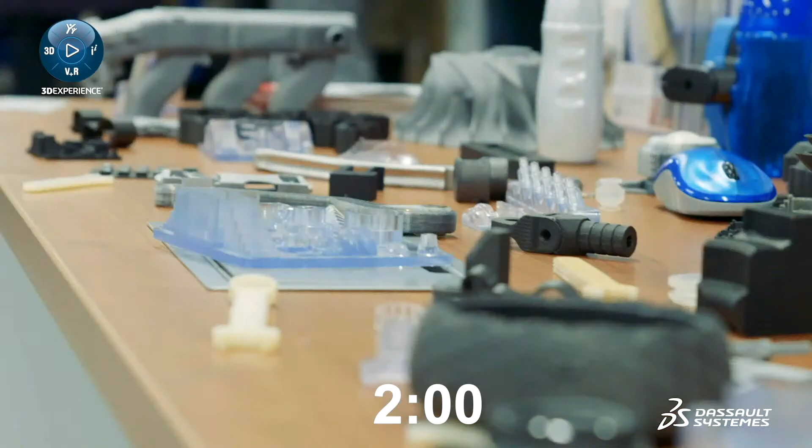SOLIDWORKS user groups got their start in 1997, created by users to learn from each other, provide networking opportunities, share their tips and tricks, and more. The first time I attended a SOLIDWORKS user group meeting was in about 2005.

What makes me keep coming back to these is that you're trying to learn new techniques, and there's a lot of minutia and detail that you're not going to learn on your own. So if you can talk to other users, it's very helpful.

The one thing that stands the user group apart, I think, above anything, is the community and the camaraderie and the people involved, and how being involved can get you further professionally and personally.

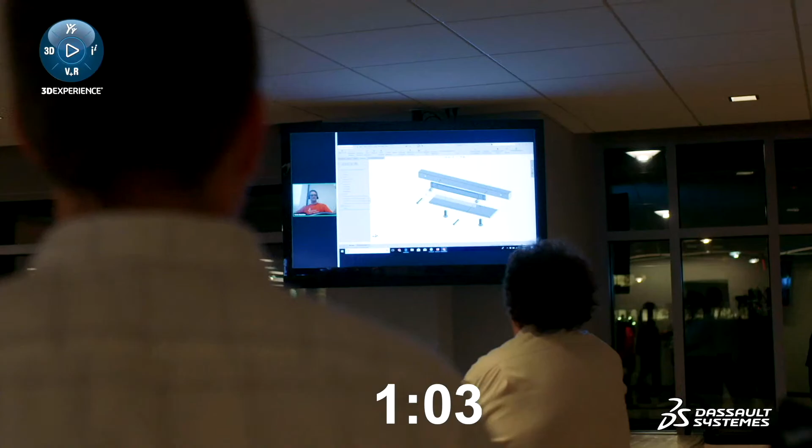Being a SOLIDWORKS Users Group member has benefited me professionally. I always enjoy tips and tricks. I've been going to SOLIDWORKS Users Group since '06. I will see one or two every time I go to a presentation that I didn't know existed, or that it's a better way to do something that I've been doing for years.

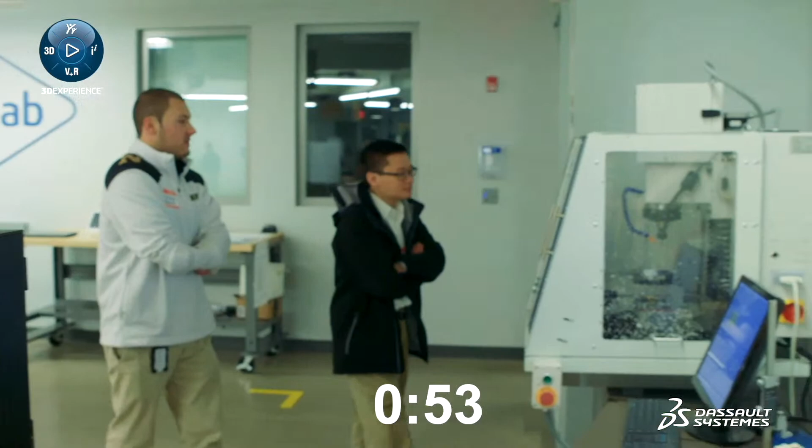I have met colleagues, which is very important. I've met suppliers, and finally, I've met potential customers for over 10 years at Users Group meetings.

I am honored to be part of this community. I have for years, and if you aren't, you should be part of the SOLIDWORKS User Group Network. It gives you tips, tricks, and shortcuts you will not find in formal training. It's awesome, and it's free.

It's a fun environment. Everybody gets to know everybody. You get to learn. It's kind of free learning. It's great networking. It allows you to learn from the experts around.

I do a lot of presenting as well, so it forces me to learn, so I'm an expert on the topic before I get up there. So all the way around, it lets me be a better SOLIDWORKS user.

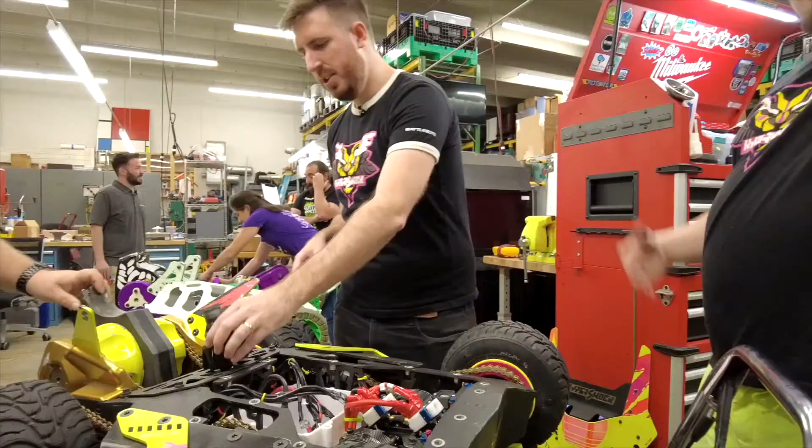So during this episode, we'll first set out by giving you all the insider look at how Battlebots teams Hypershock and Witch Doctor came to be. These teams, headed by Kyle Allner and Will Bales on the Hypershock side, and Andrea and Mike Galatly on the Witch Doctor side, are quite fortuitously based here in Miami.

So this meant we were able to grab a bite to eat with them and head over to their shop to discuss things like, how did you get into making robots? How did you get into Battlebots? How does it feel to work really hard on something only to maybe, just maybe, see it get blown to smithereens?

And for those of you at home, what advice would they give someone getting into engineering? And is there a way for you to get involved with Battlebots today? So we'll answer all these questions and more as they explore how SOLIDWORKS has helped and continues to help them accomplish their goals. And speaking of their SOLIDWORKS skills, both teams are giving technical presentations on surface modeling and simulation related to their bot designs at a special SWUGN meeting at the Kubek Center here in Miami.

And guess who gets to watch that? You guys, of course, and everyone going to the in-person SOLIDWORKS user group meeting. So it's a great time to get involved in the SOLIDWORKS community. You can learn, you can make new friends, and maybe even meet some TV stars from the Discovery Channel.

And as you can see, I am all set to head over to the Kubek Center for those tech presentations. Well, maybe half set. So while I go and get ready for the SWUGN meeting, let's take a look at the conversation we had with those Battlebots teams.

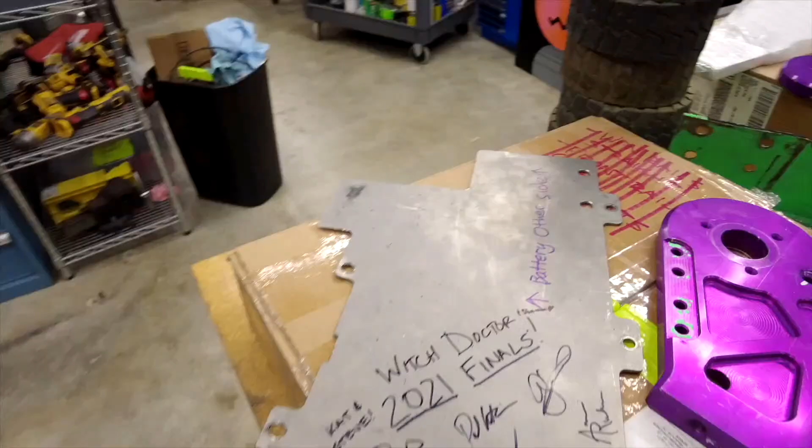All right, we're here on SOLIDWORKS Live. We are obviously not in a production studio, we're at your guys' shop. How's it going, guys? Going great. This is amazing, you guys just have so much capability. I wish you could all be here, all of you watching from home, but why don't you just start by introducing yourselves? I'm Mike Galately from Team Witch Doctor.

I'm Andrea Galately from Team Witch Doctor. I'm Will Bales from Team Hypershock. Kyle Warner from Team Hypershock.

Many of us have been watching BattleBots for seasons upon seasons, and we've had questions we would have loved to ask you if we were ever in Miami and you invited us to your shop. We have that here today, so I'm excited to ask some of these questions. And of course, we have the bots right in front of us. This is super cool. These bots were designed in SOLIDWORKS, right? Of course, what else would you use? What a ring? Is there something else? What a ringing endorsement!

But I think just to start at a very human level, how did you guys get into BattleBots? That's a question we get a lot. Whenever we talk to the BattleBots teams, like I've talked to you guys over the years about just getting SOLIDWORKS and the best stuff to use, but how did you guys get into BattleBots? That's a pretty long answer, but I'll let you start.

Well, I'll start with how it ties back to SOLIDWORKS. I actually started using SOLIDWORKS in high school, and we didn't have any SOLIDWORKS class. I just learned to use it because I was trying to build a robot, and it's really hard to build a robot without modeling it first, it's really limiting. I went to an all-girls Catholic high school, plaid skirts, knee-high socks, the whole thing, and they had a massive, really well-regarded combat robotics program. BattleBots used to be BattleBots IQ, which was the collegiate and high school version. So I got really lucky that I was in a school where it was easy to get involved, and I haven't stopped doing it since.

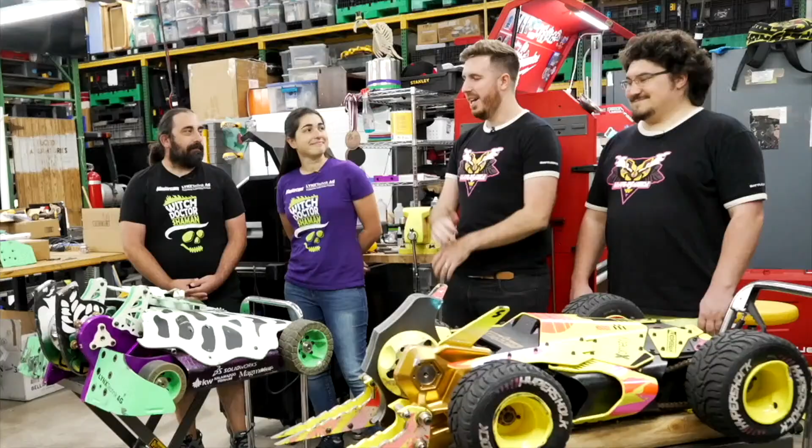So when I was old enough to do it, my friends Tyler and Benji Pantoja and I built our very first robot. It was a 14-inch wok bought from Kmart, upside down, covered in black and white duct tape to make it look like a cow, and we called it Heiferbot. It spun around, and it was our first robot, a full-body spinner, shell spinner, kind of like Gigabyte.

And it was not good, but I was hooked.

Yeah, that's really interesting. Like you mentioned, FIRST Robotics—there's a lot of people, I'm sure even in the chat, that have experience with FIRST. So it's kind of interesting to see that our beginnings can converge and then go out in many different directions.

It's interesting to hear how you guys landed where you landed today. Speaking of, another question I get a lot regarding you guys is: what is it like to be building these bots that eventually end up on the Discovery Channel? What is that like? Maybe even the first season—what was it like when you first got on?

How did that feel? Honestly, it was like a dream come true. Like Will and Andrea, when I was a kid I used to watch BattleBots on TV. And then when I got into college, we found out about this robotics club, and I went to check it out, and it was these fighting robots. Started in 2000-something, 5-ish, and kept doing it, and I've been doing it ever since.

So when the BattleBots TV show came back on in 2015, it was a dream. We were super excited to be doing it with all the people we watched growing up. And we wanted to make something really creative and really unique looking. So we submitted Witch Doctor, and had this skeleton and bones theme, just wanted to make it a really cool aesthetic.

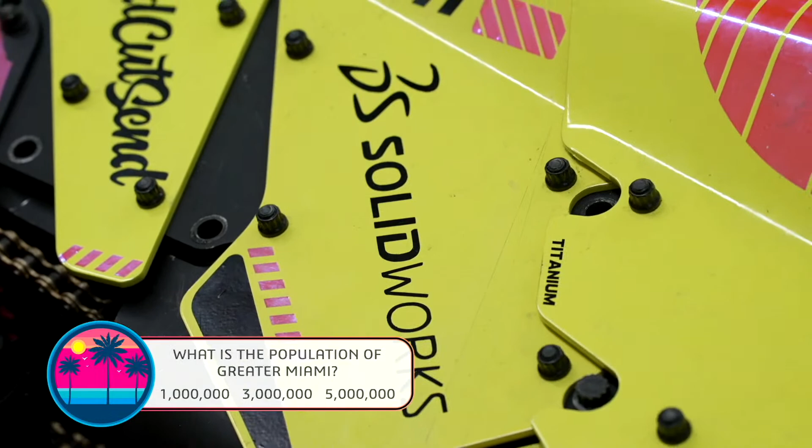Yeah, how about you guys? So I didn't get Kyle the first couple of seasons because he was still trying to go through college. I dropped out, I gave up. He was much more diligent than I was.

First of all, I don't understand it—just to be clear, you guys have full-time jobs, right? Yeah. And so this isn't like—that's probably a super common misconception, I'm sure you guys get this a lot. Yeah, this is a very expensive, time-consuming hobby that we do after work, normal full-time jobs. So it's a passion project, it's what we do for fun.

But Kyle and I started doing this in high school together. We were building little robots. And when Greg and Trey, the executive producers of the show, said hey, we're going to have a new show again, you want to build? We were like heck yes, of course we do. And so we built the first Hypershock. It wasn't nearly as pretty as this one—I definitely like this one much more.

Every season we forget about the previous one—it's totally retired. Right now for us, this is Witch Doctor, and there is no other Witch Doctor.

Speaking of, another thing I've been really curious about: what is it like to put so much energy—Will, like you mentioned, you put a ton of time into this, you call it an expensive hobby—but what is it like to put so much work into these bots and then maybe have them get destroyed, obliterated? Yeah, 100%, like what—I've always wondered, do you mentally prepare yourselves before competitions, just thinking, hey, this could happen, and you're just ready for it? How does that feel?

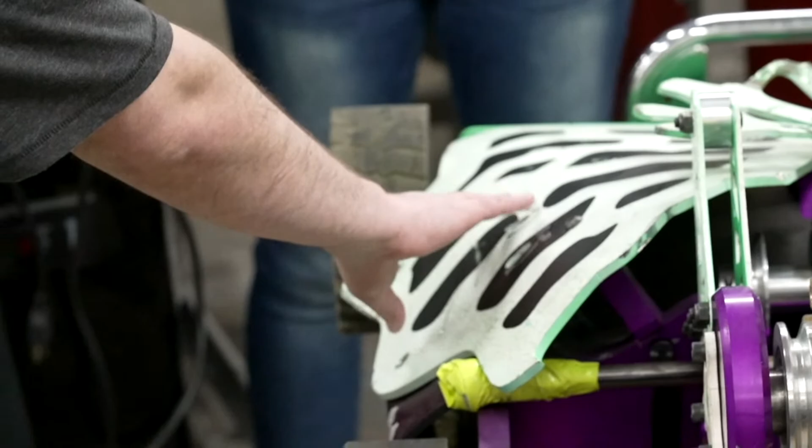Talk me through some of the design considerations, like even for example on Witch Doctor. Is this all done using surfacing tools? What am I looking at here? Yeah, so this rib armor is all 1/4-inch aluminum. We have a few different configurations of this actually, but this is done with a combination of surfacing and sheet metal tools. But the main consideration for all these robots is they all have to be under 250 pounds.

So we use mass properties, we assign masses and materials to every component in our assemblies, because you have to know. And you don't want to show up at 255 pounds because it's really hard to remove that weight. You have to start cutting parts or removing parts altogether because there really isn't a lot of areas you can cut out that don't compromise something else. So when we design the robots, we're really trying to get as close to that 250-pound mark as possible in CAD, while accounting for weld weights, hardware weights, material thicknesses, and all these other minor variables. So we have big spreadsheets tracking weights and different configurations.

I'm sure you guys do the same thing. Same thing, I was opening the assembly for this yesterday. It's 888 parts because I have every screw, everything's in there, because you need it. There's 10, 15 pounds of screws in this thing.

And like Mike said, if you show up and you didn't account for that, well guess what, now you can't have your pretty armor, or now you can't use the strong armor configuration that you were hoping to be able to have. And then you have to start making compromises, and it's not what you wanted. It's sad and it's frustrating, and it makes another challenge that you just don't need if you can avoid it.

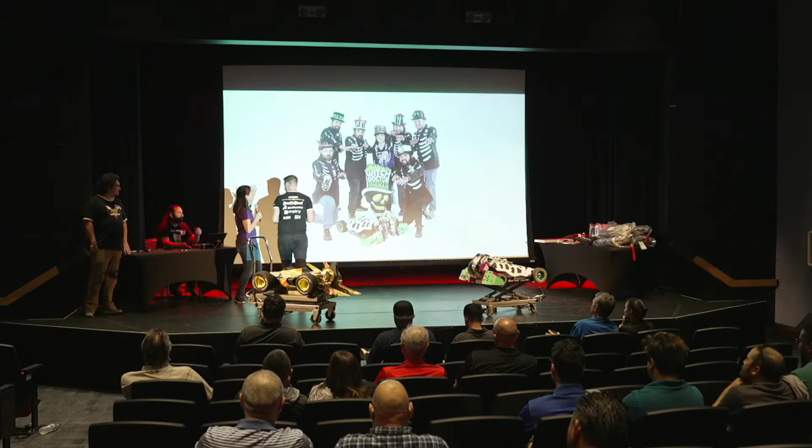So like I said, we are Team Witch Doctor. I'm really excited about this presentation because usually our audience isn't a technical engineering type audience, so we get to talk about all the things that get us really excited about designing these robots that we normally don't get to talk about with our general or younger audiences. I'd like to start by thanking SOLIDWORKS for sponsoring BattleBots, sponsoring our teams, and supporting the sport as a whole. I think the most difficult thing about sponsorship is that they have to trust us and give us resources and money before there's even a robot, or a plan for the robot. They're at the very, very early stages, so there's a lot of trust in us to come up with something cool and deliver a competitive robot. So thank you so much to SOLIDWORKS for making that happen for us.

If you've seen the show, you know our team is best known for competing in skeleton jackets and top hats. We're a very colorful team. Right there at the bottom of the screen and here in front of you, you see Witch Doctor. We put a lot of effort into making a very competitive robot that also looks really cool aesthetically. It's a really fun challenge, and all of the features in SOLIDWORKS really help us make that happen.

I'll give you a little overview on Witch Doctor. We have been in all 6 seasons of Battlebots, just like Hypershock has. I think we're only one of a handful of robots that has competed in every season of Battlebots so far, since 2015. Spoiler alert, cover your ears if you haven't seen the season finale, but we are coming off a finals run on the 2021 season of Battlebots, so this is our second finals run with Witch Doctor, and we have some other awards that you can see there.

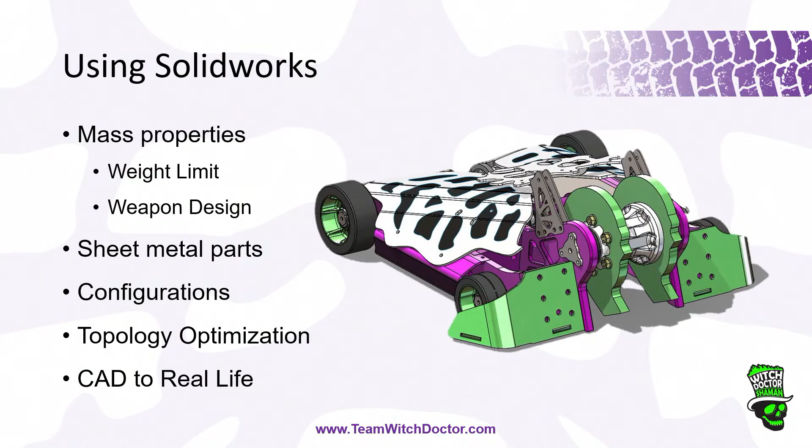We talked about how we really want to make Witch Doctor aesthetically pleasing and a really cool design, not just a simple box. Our formed sheet metal parts really play a big role in that. If you look at Witch Doctor, a lot of the parts you can see are formed and help give it its unique shape. So we're going to talk a little bit about the complexities in making that happen.

If you watch the season finale, you'll see that for our last 2 matches, we actually debuted a new configuration with a single disc. We had to design that to be within the same weight and work with a lot of the same frame that we had. So we used configurations in SOLIDWORKS to make that happen.

And because of that weight limit, we actually got to use a feature that I believe is pretty new to SOLIDWORKS, which is topology optimization, to really tweak some of those designs. Finally, we'll show you some of the process of actually building Witch Doctor and getting it ready for battle.

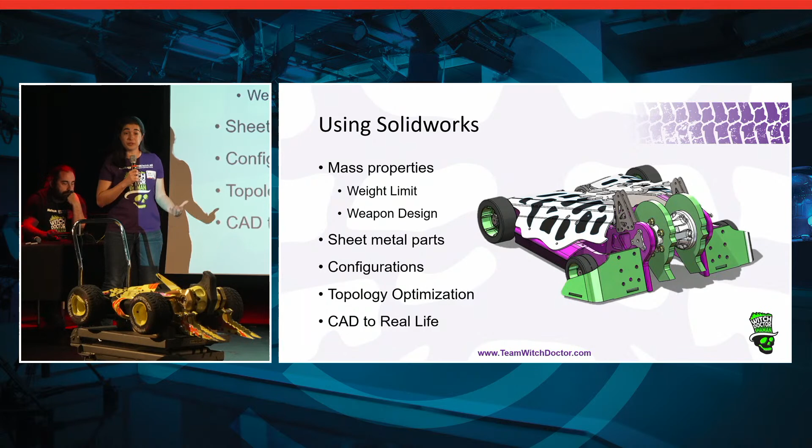All right, so let's jump right into it. The weight limit on Battlebots is 250 pounds, for those that don't know. So when you see these robots flying through the air, try to imagine how much energy it takes to throw a 250-pound robot of this size 16 feet in the air. And imagine what you have to do to survive landing that and survive being the one to toss a robot up that high. So there's some really, really significant forces involved.

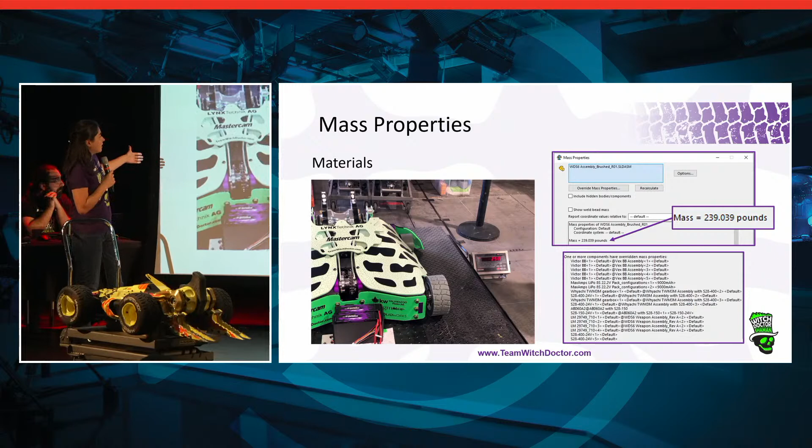This is Witch Doctor this season on the official Battlebot scale at 250 exactly. So you don't want to compete underweight at all, because when they're throwing you, that's just an advantage for them. So we try to keep it as close to the limit as we possibly can.

Here in the mass properties dialog, you'll see that the robot on CAD is designed for about 239 pounds. Our goal was 240, so we have a little leeway. And that's because there's a lot of weight in wiring, mostly in electronics, that we don't include. We haven't gotten to doing all our wire routing in SOLIDWORKS yet, maybe in the future, but for now we estimate that. So we kind of give ourselves a little grace there.

And then underneath you can see all of the custom components that we have, which are our speed controllers, our batteries, our motors, all the parts that we model to match the actual physical parts and bring into SOLIDWORKS so that we can design the mating parts and estimate the weight. So all of those parts actually have overridden mass properties so that they have as close to actual weight as possible. So we don't trust the motor weight from, we use MagMotors, we don't trust it from their website. We actually take one and weigh it and make sure it's as exact as possible.

Because when you have an assembly of hundreds of parts, every ounce is going to add up to getting you overweight. And if you're overweight at the event, then you have to start cutting weight from places you don't want to start cutting weight from.

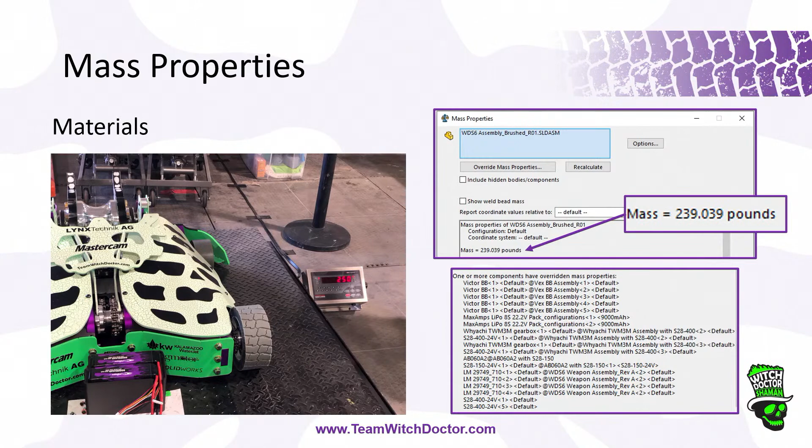And then the other thing we really use a lot on mass properties is center of mass. Here I'm going to talk specifically to the weapon, but before I get to that, center of mass on the robot assembly as a whole is also really important. You'll see that the heaviest part of our robot is this big steel weapon right at the front. But we're four-wheel drive, so we actually want the center of mass for the entire robot to be centered on the center of the wheelbase as closely as possible. We don't want the robot to be tipping or trying to pop wheelies if that's wrong. So that really lets us move the motor placement and move our internals around to be able to really balance the robot and drive really well, which was a big focus of our season this year.

Something that's not unique to our weapon, but a really big part of what makes our weapon so effective is that we have a single hitting tooth. We don't have a second tooth on the other side that balances it out. And in order to do that, we rely really heavily on the center of mass features in SOLIDWORKS.

We also have this really cool skull shape on our weapon, which you can imagine, we're not going to take out some paper and try to figure out center of mass with geometry. It's not going to work out. So we really do that dynamically within SOLIDWORKS. And we kind of tweak to optimize the shape so that it's also the lightest weapon assembly that we can make while still making it strong enough. So optimizing that is really, really important.

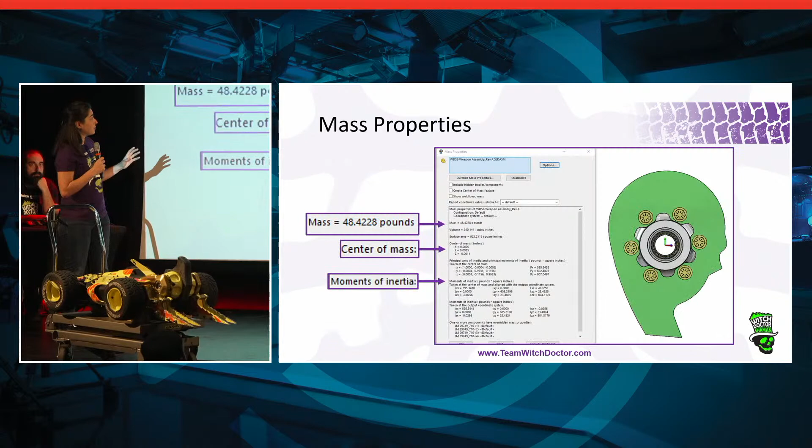Here you can see the exact mass on our weapon assembly. It's 48.4 pounds, so that's the entire spinning mass. That includes our bearings, our hub, all of the hardware, and the center of mass, like I said.

And another really critical thing in this dialogue is moment of inertia. So by using the moment of inertia without having to calculate it on this complex assembly, we can actually estimate how high the energy is that we're going to be delivering to our opponent. That way we can figure out how thick we need to design parts for our own robot and obviously optimize the energy of the weapon.

You'll notice that it's not just a simple bar, and that's because the further out you have the weight on the weapon, the higher your moment of inertia is. So it helps us maintain the weapon spin up and hit a little bit harder.

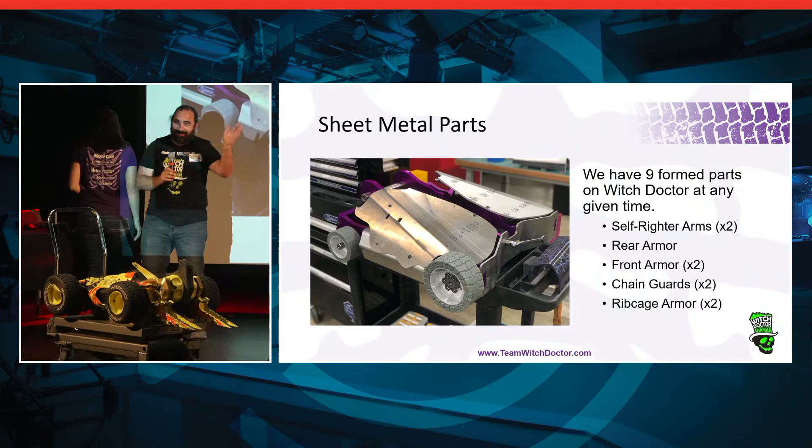Hello, I'm Mike. I'm going to talk about some of the other design features of SOLIDWORKS that we use to design Witch Doctor. Like Andrea said, every team kind of has their own workflow. A lot of teams have multiple sponsors that help bring these robots to life.

Will spoke before about designing a lot of things for laser cut sheet metal and welded weldments. We have a water jet sponsor, so we do a lot of aluminum water jetting. It really depends on what processes you have at your fingertips, and who's willing to support that. Obviously a lot of people pay for stuff, and a lot of people go out for sponsorship. So there's really a wide range, and there's 60-something teams this season, maybe more.

When you look at other robots on the show, you can kind of see, if you think about the manufacturing processes involved in making these robots, some teams have access to their own CNCs at their own shops or whatever. So you see a lot of billet parts on those types of robots.

We use a lot of sheet metal parts for the armor, as Andrea mentioned, and we have multiple configurations of said armor, which we also track in SolidWorks. You can see here, this is basically right when we got parts from the water jet, our water jet sponsor who also does the forming, and you see the still raw aluminum armor here. This is the first time we've really put the robot together, just to make sure these holes line up, right.

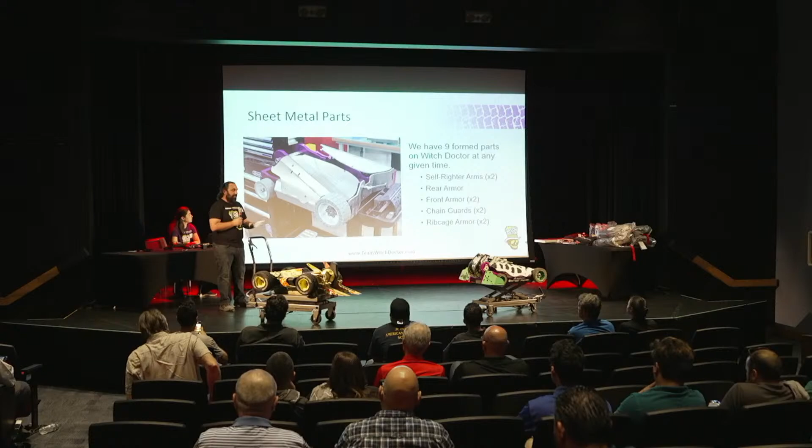So you have to plan for taking a lot of damage. Your robot has to be repairable, and you have to show up with multiple sets of parts. And you don't know who you're going to fight ahead of time. There's 60-something robots, and a lot of them are different types: lifters, grabbers, horizontal spinners, et cetera. So you have to have all these different armor configurations for different robots.

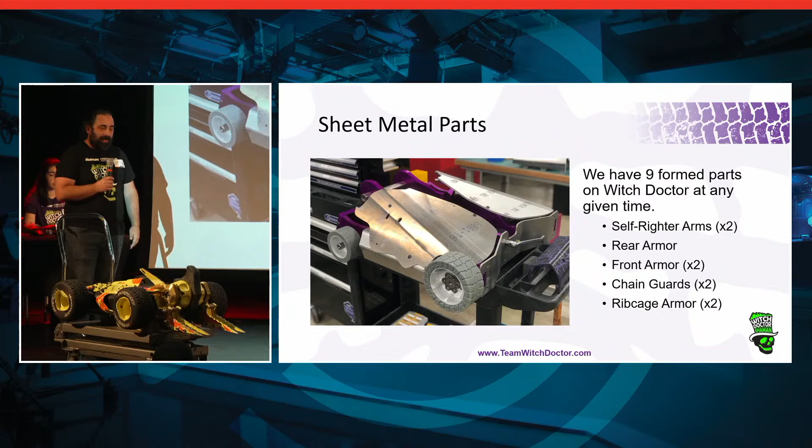So here's some of our sheet metal parts. In SolidWorks, we do all of our manufacturing drawings, and as you guys all use SolidWorks, you know that the sheet metal features are really great and super easy—just click a face, export DXF, and you get your DXFs out and saved for WaterJet or whatever secondary processes you use.

Then we create bend drawings, because those 2D parts go to a forming process. We have bend drawings, and we actually create bend gauges that are basically a 2D template we can quickly check—that's for the manufacturing guy to check. But as you saw on the previous slide, the parts actually line up, surprisingly, so awesome.

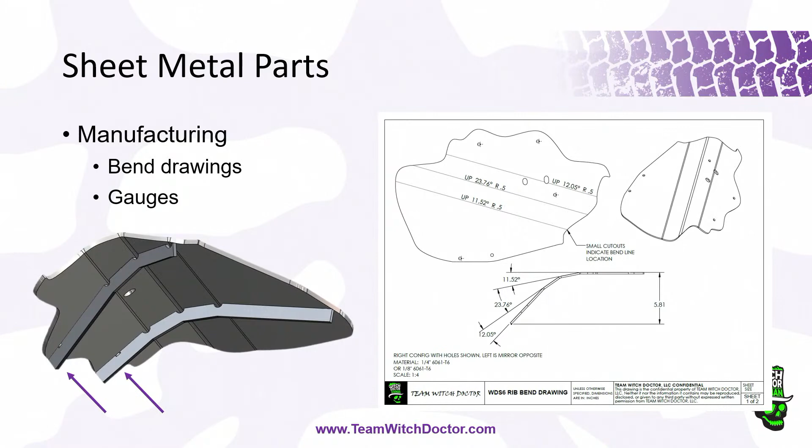In order to achieve that configuration without changing out the whole frame—because you want to minimize your time between matches—if you have a quick match and need to switch configurations because your opponent has a specific weapon type, you might want a single disc since it's a thicker slab of material, so it's a lot stronger, maybe for horizontal spinners or whatever.

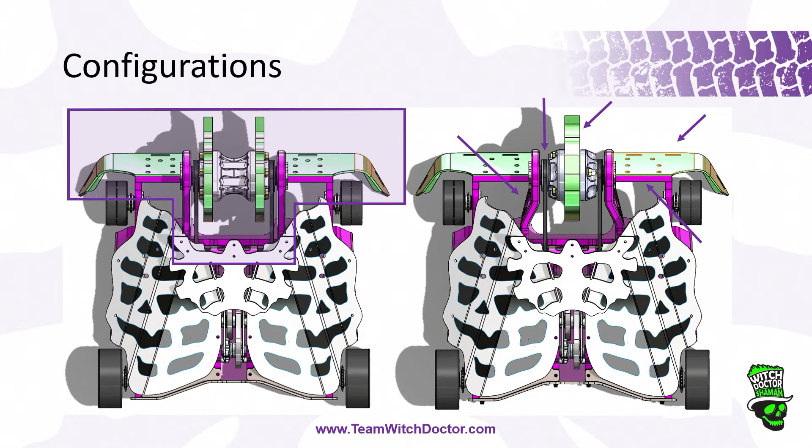So these configurations, we use mate configurations. The frame, all the purple stuff, is a part file with a multi-body part, so that has its own configuration—the configuration matrix is pretty crazy. But this helps us keep track of weights and make sure we can quickly check interferences and clearances for hardware and all of that.

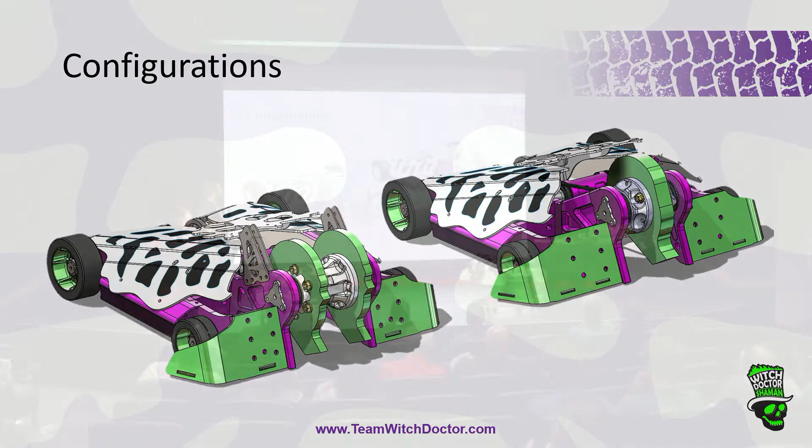Like Andrea said, this is 250 pounds hard limit—they don't give you any room to budge, and one scale might be a bit more sensitive than another since they have 2 scales. So you really have to be—you can't be 250.1. You have to be 250 and then maybe even a smidge less just to make sure, because the wind's blowing one way or the other.

So as you see on the left, this is our dual disc configuration, and we have a lot of parts that are basically suppressed for the single disc configuration—it just helps us keep track of everything sanely.

We got a hold of this topology optimization. A lot of people ask, do you do any FEA with these BattleBots? The short answer is that the amount of force other robots apply to your robot—you can't even fathom how much force is required to throw a 250-pound robot. So if you do FEA, you're basically testing everything to failure. I'm pretty conservative when it comes to wall thicknesses and stuff like that.

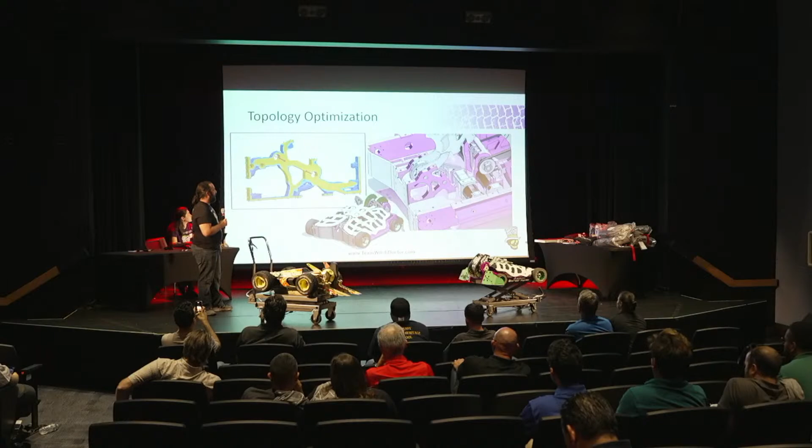But when we did this topology optimization, we wound up calculating—you can see on the top right image, that's our self-righter up at an angle. We calculated how much force it would require to self-right the 250 pounds back over, since that's pretty straightforward—there's no other robot hitting you. It's an easy calculation to figure out the moments and chain tension required to get the robot back over. So we were able to do this topology optimization pretty safely.

Can you go back one slide? Thanks. To reduce—the original design wasn't a solid body quite like that, but it did have some weight holes removed. We were able to kind of skeletonize that part while running this topology optimization, and be confident it would give us something that wouldn't fail. I don't know if anybody's used topology optimization here.

Hands? No? Hands? Yeah, cool.

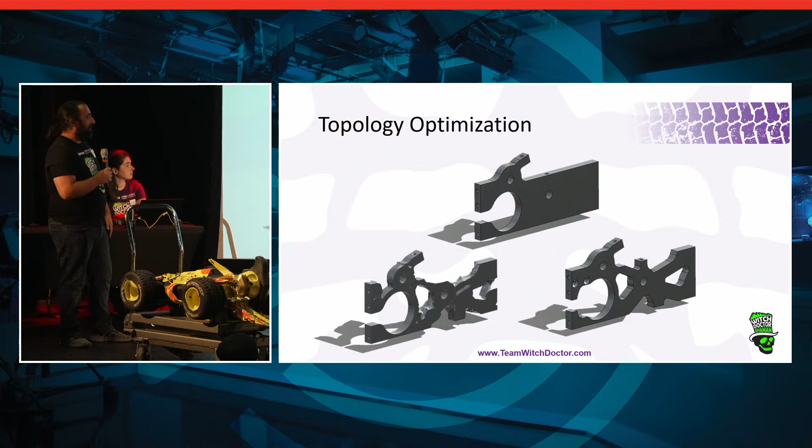And that's the only place, unfortunately, that we've used topology optimization. The one on the left is from 2020, and the version on the right is from 2021, the robot that's here. So we did change it a little bit. You can see this strut on the top doesn't really take any load in the loading scenario we applied to it, so we were able to cut that off and save us some weight and some space inside the robot.

So hopefully we'll get to use that more if we get more familiar and more comfortable doing that.

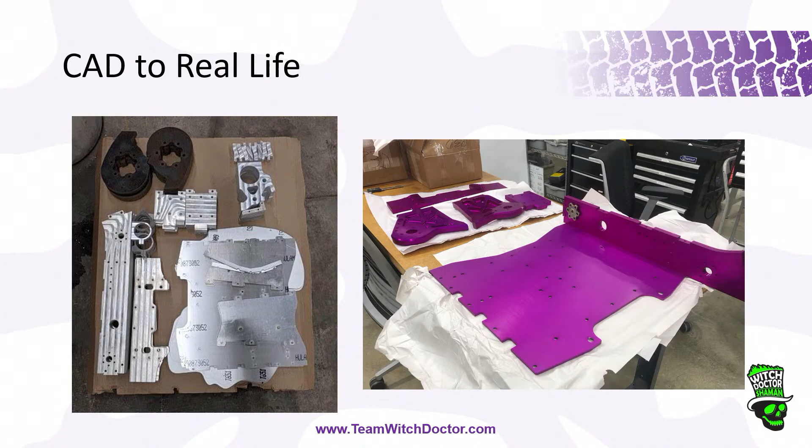So now comes the fun part. The design's the fun part too, but it's really fun to start actually building the robot.

So here you can see all of the parts. This is from Kalamazoo Water Jet that does all our water jet cutting. If you look closely, you have some of the ribs that haven't been formed yet, our weapon assemblies, a bunch of our frame rails. So we basically got a flat pack version of our robot.

Then we take everything to anodizing, so it's that really bright purple. This is the first year we've anodized our frame instead of painting it, and we were really happy with that—it held up a lot better.

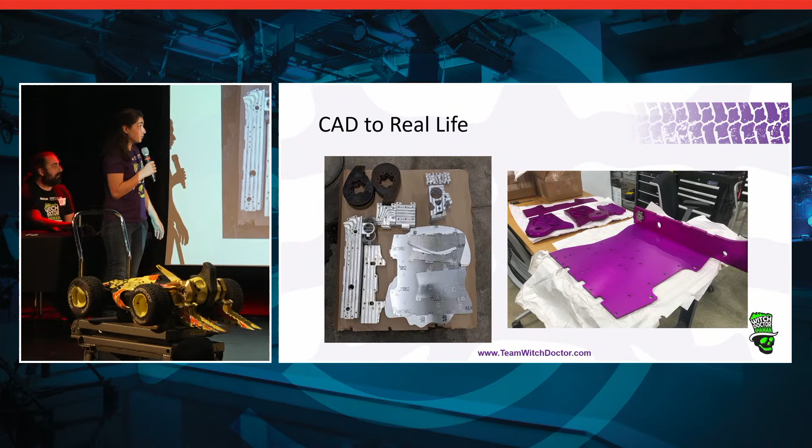So then we get to start putting the parts together. Here in the first picture, you can see we're starting to test parts. Now we rely on SOLIDWORKS a lot, because by the time we get to this part, testing fitting parts, we don't have time to go do a whole other iteration, so things have to fit. Obviously we can make small tweaks—we do have some machining capability—but we really need the parts to fit.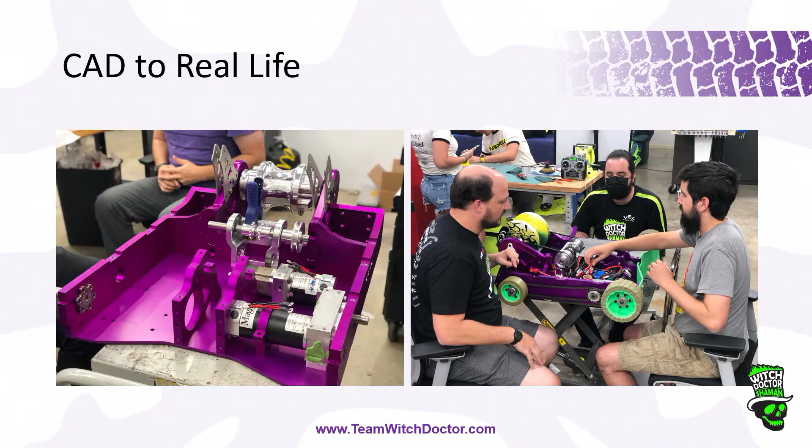And then Mastercam does all our CNC machining, so you can see the silver parts there are all CNC machined and everything's starting to come together. In the second picture, you can see the entire team jumping in and adding the guts to the robot—the wiring, the chains, everything that makes it run. You can see Hypershock in the back, so that's how closely we actually work together during the build season. There's no secrets between the two teams.

And then finally, the most fun part of all is to actually put them in the battle box and fight some robots. We like to joke among all the teams, because the teams are friends, that we get together once a year and break each other's toys. Because we spend all year trying to figure out how to build them, design them, put them together, and then the first thing we do is slam them into each other.

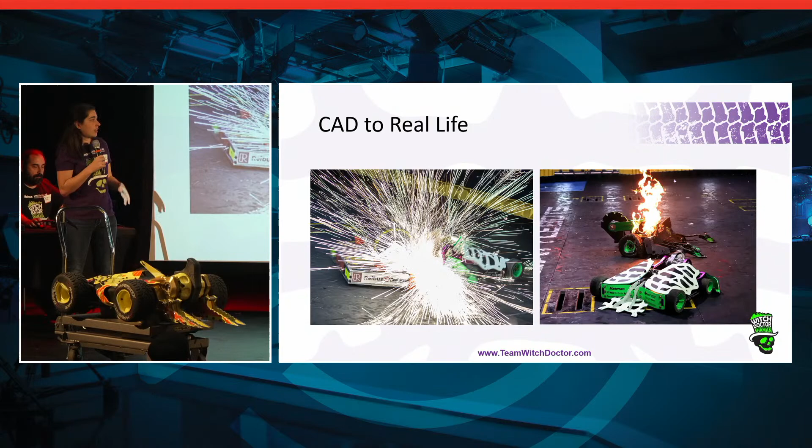This first picture is against last year's champ Endgame, which is another vertical spinner, so there were a lot of weapon-to-weapon hits. I'd say pretty much the whole match looked as sparky as this picture here. The second photo is against Saw Blaze, a super destructive overhead spinner, which actually inspired a lot of the rib look on Witch Doctor because of the direction that they hit you. This was a semifinals match from this season.

All right, so that's it for Witch Doctor. We're going to switch over to Team Hypershock and let them talk about how they use SOLIDWORKS to design Hypershock.

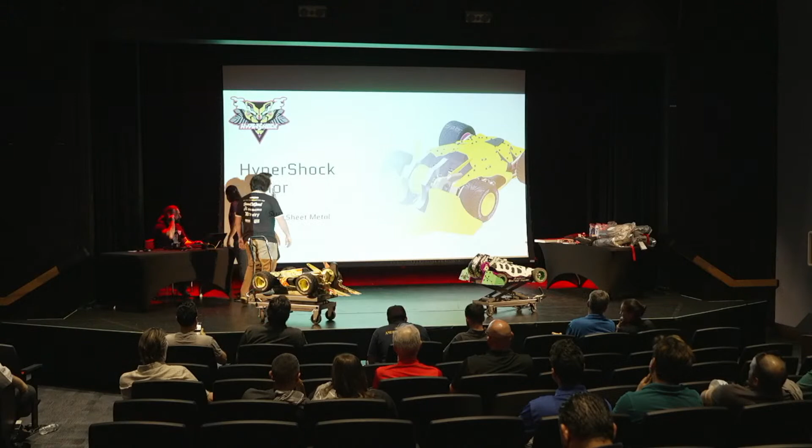Alright, okay. So Mike and Andrea did a great job of giving you a really good overview of what goes into building a robot, what goes into designing a whole robot. We're going to talk about the armor.

So Hypershock, like Witch Doctor, we prioritize the aesthetics of the robot. We want it to look cool, right? It's a passion project for us, so by golly, it's going to look good.

So at this point, here's your scenario. We have all our machine parts ordered. I've already designed all the CNC parts because they're longer lead time. I've sent them out, they're getting made. So the weapons, the wheel hubs, all the bits are there. And I have this Oort cloud of floating components in an assembly. Now, unfortunately, robots don't stay together like that in the arena, so you have to stick them together with stuff.

It's August 4th in this scenario. Totally hypothetical, definitely didn't do this in real life. Battlebots is filming on the 20th, and I have no chassis and I have no armor. So I have 16 days to design the sheet metal chassis and the armor and build it.

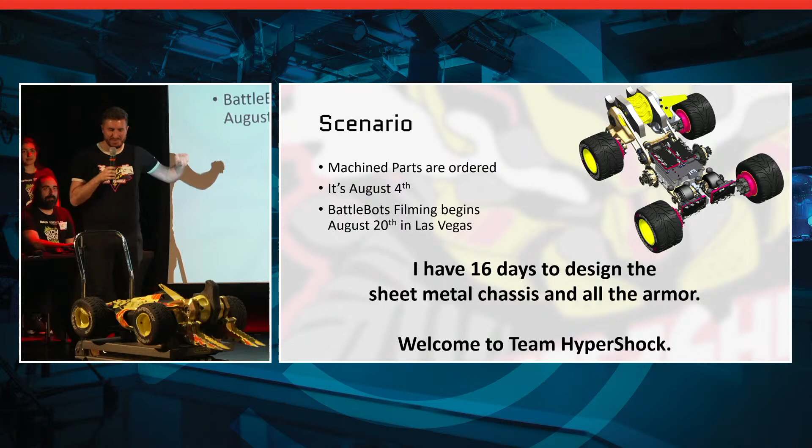So some context. We have a history of showing up and building the robot at filming. For better or for worse, I am the king of procrastination, and it's almost become expected at this point.

For the armor itself, this is one of those rare examples of function following form. Truth be told, underneath the armor that we're going to design today, there's some more armor. When you come up here and see it, if you're here in person, there's a 1/4-inch titanium plate underneath this. We don't really need this cool stuff on top, but it's cool, and I want it.

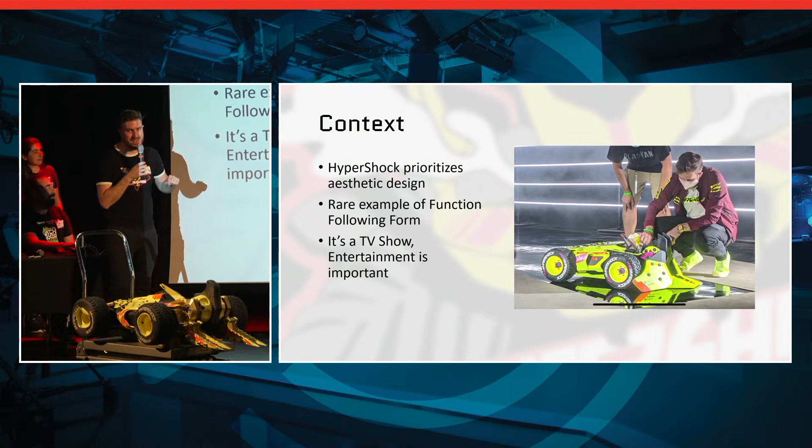So guess what we're building? Because, like it says here, it's a TV show. Entertainment is of utmost priority for us, and that's what makes it fun.

So here's our armor design prompt. It needs to fit around the internal components and the chassis that I've yet to design. That's another fun one. And what I'm actually going to do here is I'm going to take my Oort cloud of parts, and I'm going to design the armor around it, and then I'll make the chassis attach the two things. So I'm doing this inside out, outside in approach, because I'm a crazy person.

I need to make it manufacturable because I have only finite resources. We are sponsored by SendCutSend. They have great laser cutting services for sheet metal, so guess what we're making it out of?

We need to consider the limitations of bending titanium and AR500, because what we wanted to do is we wanted to have an aluminum, a steel, and a titanium version of our armor that all look the same. We want no one to know which configuration we have.

So if we're going up against a hammer, maybe we'll go with the thicker stuff. If we're going up against a spinner that's going to hit the sides, the top's not going to get any damage, put the light aluminum on top. But we don't want people to find out. There are some things that turns out Witch Doctor didn't actually know until a couple weeks ago, so that was fun. We need to hide some crimes.

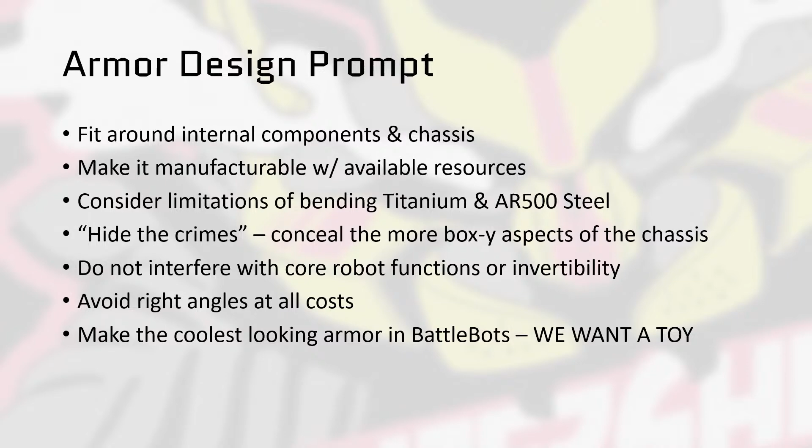So try as I might, you can't make everything non-rectilinear. All the batteries keep coming in square shapes. All the motors want to get mounted perpendicular to other things. Chains don't go around bends. So I'm going to use the shape of the armor to try to hide some of the more boxy parts of the robot.

And we need to not interfere with core robot functions or invertibility. So we got rid of the self-righting mechanism here, which has been quite the controversy for some fans. But the self-righting mechanism was like 30 pounds of stuff, and we figured 30 pounds of stuff is probably better serviced in armor and weapon power. So that's what we did. But that means when it's upside down, the armor can't be in the way. If the pretty stupid armor gets in your way and you can't function, then it kind of defeats the purpose.

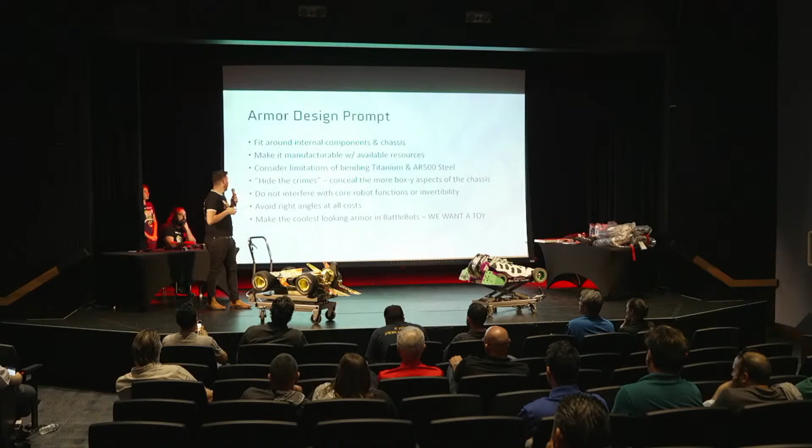We need to avoid right angles at all costs because, like I said, I'm a crazy person, and our designer and I—we have a designer on the team, Isaac Labarsky, and he's responsible for the graphics and the aesthetic of the robot—so he and I are going to go back and forth in this process. We like non-boxy things, and you can't hide your crimes with more crimes, so no right angles.

And ultimately, we need to make the coolest looking robot armor in Battlebots because we want a toy. The best thing you can do as a Battlebots builder is get a toy. They have 2, so I just want 1. So I need to make it look cool.

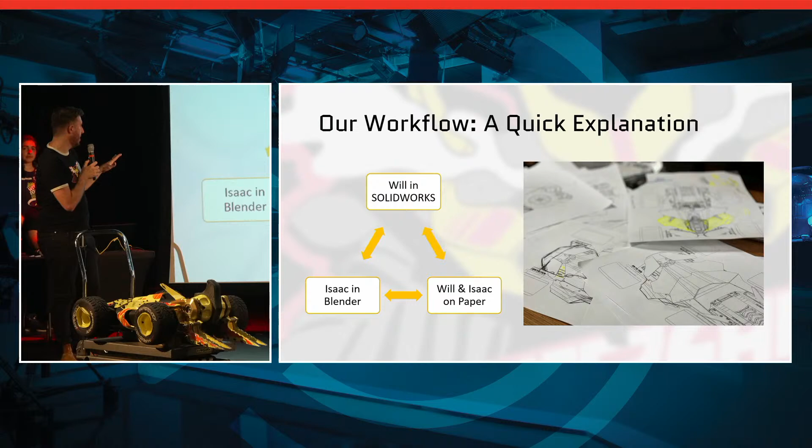So here's our workflow. Isaac is a graphic designer, he's not used to CAD. What he's comfortable with is paper, Illustrator, and I got him into Blender. So here's this back and forth workflow that we go through.

I'm in SolidWorks, and I give him this rough assembly of where parts need to be. Then he brings it in and starts drawing on it. We print things out and start drawing on pieces of paper, and the desk is covered in paper. It's a total mess, but it's starting to work.

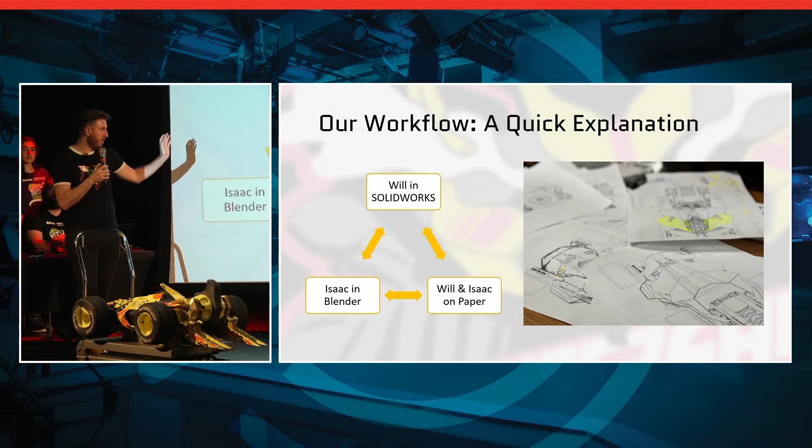So we get to the point where we have some approximate ideas of what we want this thing to look like. It's not perfect. There are some intersecting parts, things that can't be manufactured. Sorry, Isaac, that's a compound curve and I can't make it with a 2D bend. So there are some compromises I need to start to consider when going into SolidWorks for real.

So I take Isaac's screenshots and set them up on reference planes in reference sketches, and then we get to work. So I'm going to walk you through it.

All right, so we have our three reference sketches. I have the top views, and this looks pretty neat, but you can tell like here, for example, it starts to fall apart. And you can see from the side, this is last year's side armor. It doesn't work, but we want something as a placeholder.

So we're thinking as we're going. Remember, we have 16 days to make this thing, so we're working fast.

Like I said, we need to be invertible. So I draw a line between these horns over here that keep the weapon off the ground when it's upside down. It's supposed to do that.

Yes, I know everyone in the YouTube comments is saying, oh, that didn't work. Well, they were supposed to work. I'm sorry that 3/16 thick titanium was insufficient.

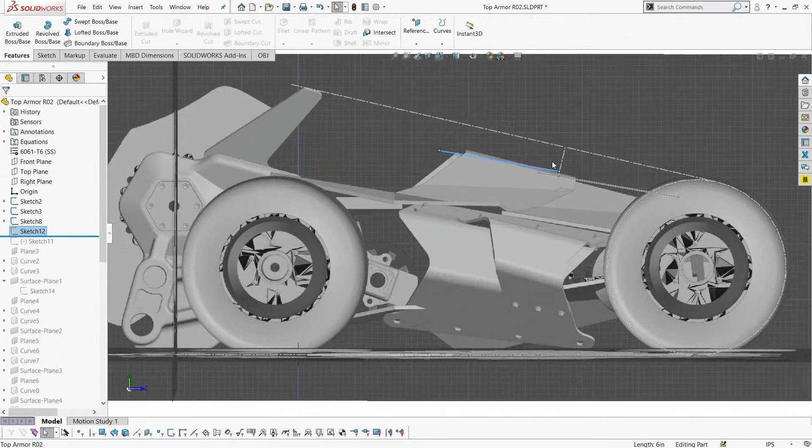So we have this here, and I have a reference line of where I think the top of this louver panel thing is going to be, and still give us like 1.25 inches of ground clearance when we're upside down.

So this is where things get messy. And I apologize to all the SolidWorks purists out there, because you're going to see some things you're not going to like. I contend that there may be a right way, but there's no wrong way as long as the model looks right at the end.

All right, so I need to make a plane. What I do is make a plane right here that I'm going to start a sketch on. And then I start projecting curves.

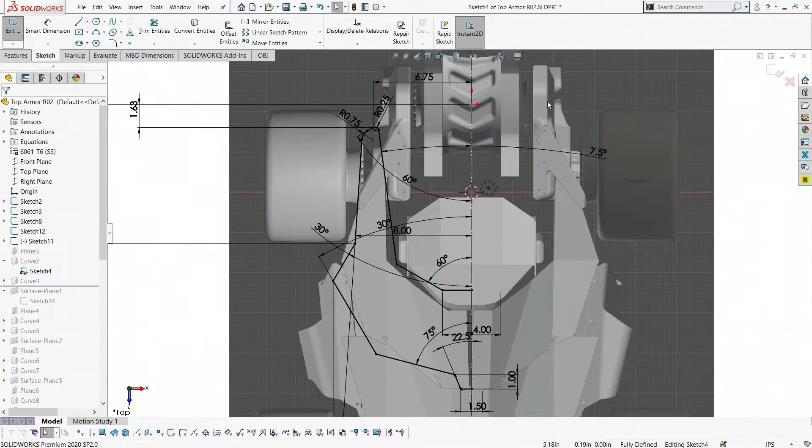So what I did is I went in here and made this ugly drawing of what I think is going to be a shape that I can make that will fit around the other components in the robot, and works with the angles and other design ethos we've been going with. We do a lot of 30 and 60 degree angles, very consistent geometry. It helps when it's 3 in the morning and I don't know what angles it should be.

So I have this shape, and I'm going to project it onto this plane. So I have this curve projected on this plane.

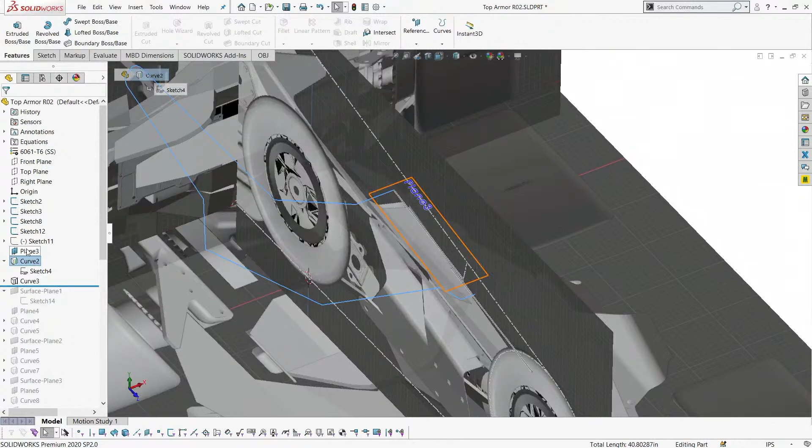And then I need some bend lines. Now this is taking a swag at where I think I'm going to bend, because I'm not doing this within an assembly. I'm taking a stab at where I think the components will need to be and where I think I need to have space and geometry.

So I put some bend lines in a sketch here, and I also project that onto that plane. And then I convert some entities, and I make the first facet of my... what are we going to call this? Armor panel. And I start rinsing and repeating.

So I do that one. And then I make a plane at an angle. I put it at 40 degrees, and I do the same. I make another one. What I'm doing here is projecting these curves on these planes, and again, doing all sorts of terrible things to the SolidWorks gods.

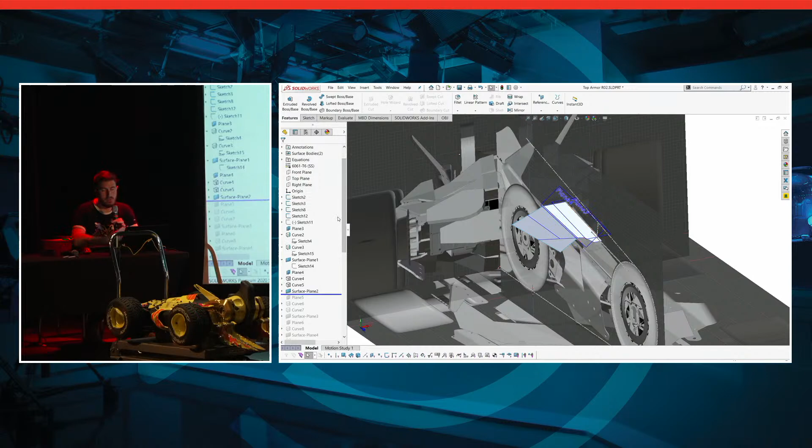I'm sorry. But I'm starting to make a shape. Again, 3 in the morning, 4 in the morning, probably on the 5th. And then I do it again, and I'm starting to make this shape. So when you look at it, we're deviating from Isaac's original design, but he and I were talking back and forth, and we're figuring out what's going to work.

And keep doing it, and now I have more or less a shape that I think will work. I knit it, turn it into sheet metal, convert it to a solid, and mirror it. So now I have more or less a thing I could imagine making, which is good.

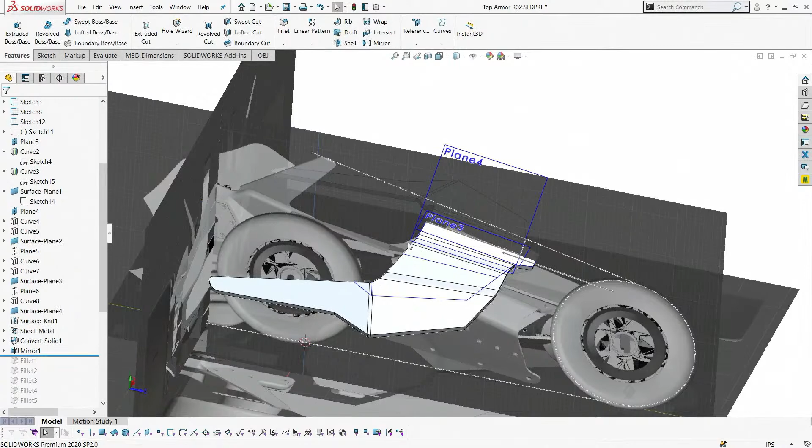None of my bends are going to require some crazy thing. I'm thinking back to experience in the past - we work with a local bender for the local people, right behind the Big Cheese. It's great, you can get pizza and bend metal. I know they have a 2-inch diameter die, and they're comfortable bending AR500 steel and titanium in this kind of gauge. So I can get away with about 40 degrees, and that's about it.

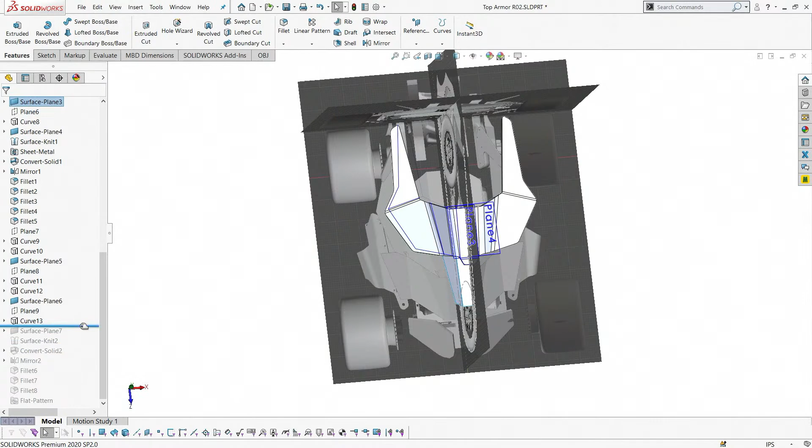So I'm feeling good about this. Then I start going through and making it pretty, putting fillets on, making myself feel less lost and hopeless at 4 in the morning. Then I start doing it again for the next panel, doing this trick where I'm converting entities, projecting curves, and making more facets. And lo and behold, we finally start getting something that looks like some armor - it starts to look representative of something.

At this point I'm again feeling better. So Isaac and I start going back and forth, and we'll start doing all the other little panels - the side armor, the front armor. In the meantime, I'm starting to figure out where a mounting point's going to be, what kind of weight we can get away with as everything starts to go together. All the things Witch Doctor talked about - managing weight, optimizing shapes - I have to do in real time, in a time crunch, because I'm a terrible person.

So all told, we went from Rev 2 at 3:05 in the morning on August 5th, to Rev 10 days later at 11:52. And you'll look at this calendar and notice that 11:52 p.m. on the 15th was the night before.

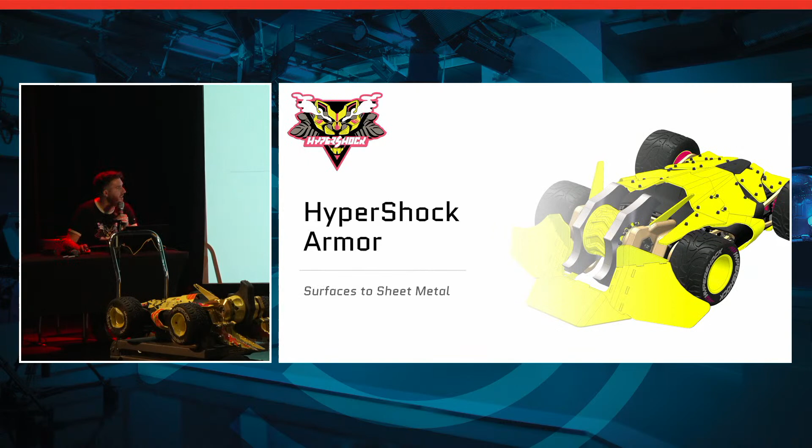11:52 on the 15th is the night before we can send it to our sponsor and beg them to make these parts overnight. So we send all the parts over, and I've also done the chassis, which we haven't gone into - that's a story for another day.

So we send all the parts to SendCutSend, they start making them. They start questioning whether we're sane or not, and whether we're actually going to make this in time. We did get notice from another builder who works there, like, should we actually make their parts? And they're like, yes, please make their parts, they'll figure it out. Thank goodness.

Thank you, Shay. So we go from the 16th and the 17th, they're making it. They ship it overnight at great expense - turns out that shipping hundreds of pounds of metal costs about $3,000 from Nevada.

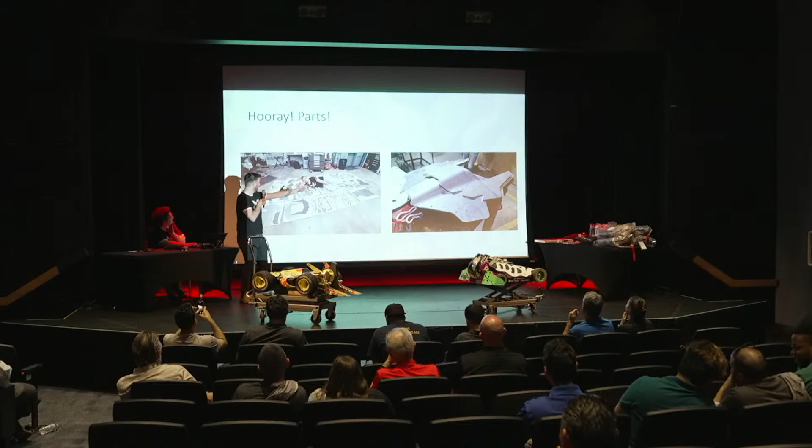So you can see our bounty of all our parts. You can see this here is that first top part that we made, and then over on the other side of the screen, you can see it all bent, and then the final product with SolidWorks.

Yeah, there you go. That's how you make a robot in 10 days.

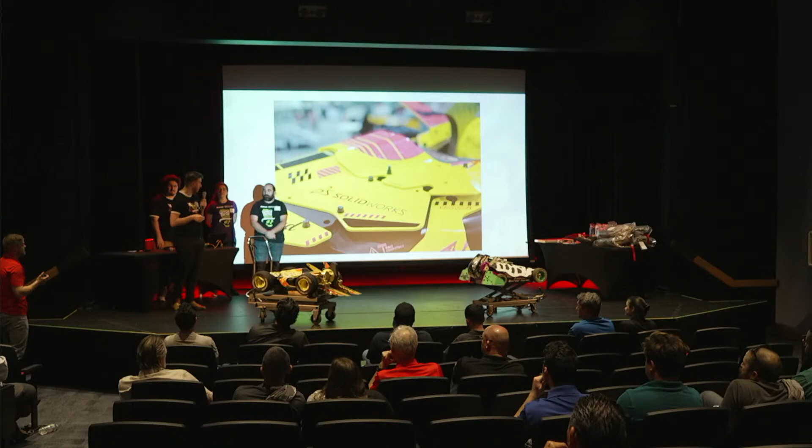So maybe we shouldn't build spinners—be more fun. Great question from the chat: Matt's been wondering, asking if you engineer failure points, things that can shear off on purpose or anything like that. Shout out to Matt—he asked if we engineer in any failure points, shear pins, purposefully delicate parts.

That's a good question. Andrea mentioned earlier about our molded wheels. A lot of people design their robots to be super robust, which is kind of a lie—like Will said, everything's kind of flexible, everything kind of gives a little bit. Our wheels are machined aluminum, 6061 aluminum, and they're pretty thin. The rim itself is probably 1/8 of an inch thick on average, nominal thickness, and they get hit a lot depending on who you're fighting.

So we designed the wheels kind of weak so that they do get bent and take a hit, and they don't rip off, because like Andrea said, we've had that issue in the past. That's one failure mode we kind of let happen. They can be out of round, bent, deformed, but they still roll—as long as they still roll, they're still functional.

The axles that we use now are 1-inch titanium, which have been great so far. We've used them for 2 or 3 seasons or so, and they can bend without breaking, because we did have that issue also once before.

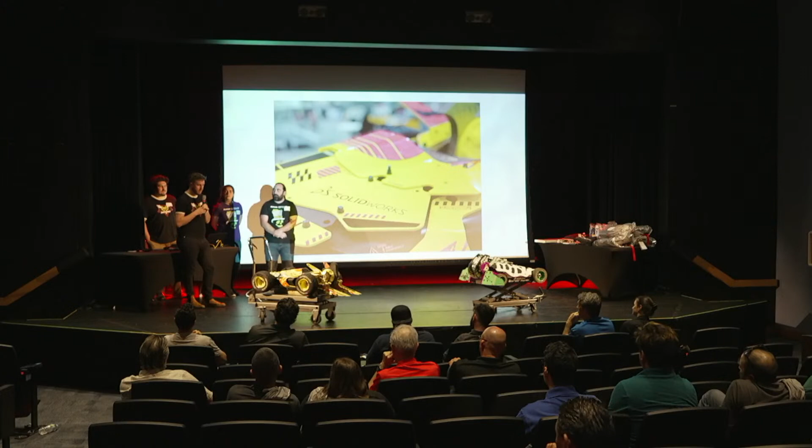And then the pretty armor parts, the yellow armor bits up here, we're treating them as two things. One, they look cool, which is very important. Two, they're separating the big damaging hits from the inner layer of armor, the heavy duty stuff. I'd rather have the side or top get crumbled in and nothing gets into the robot, and just have to replace the pretty bits. Besides, they sell better on eBay that way.

There's some good questions in the chat, and I want to change gears a little and ask more of an experience type question, since you hinted on the wheels a second ago, and something you mentioned last night struck me. You guys end up selling some parts on eBay, right? We talked a lot about the design process and using SOLIDWORKS. Could you talk about what it's like building a fan base and getting recognition, being Battlebots famous, to an extent? I think everybody would love to hear that.

This is true for most of the builders on Battlebots. First and foremost, we're Battlebots fans, fans of the show. When we showed up in 2015 for the first time on the TV show, our first fight was against Bronco, one of the coolest robots, one of my favorites, and to be in the arena fighting those kinds of robots was amazing. You talked, Will, about having a similar moment fighting Lockjaw this season and Donald Hutson. So that's really, really cool for us.

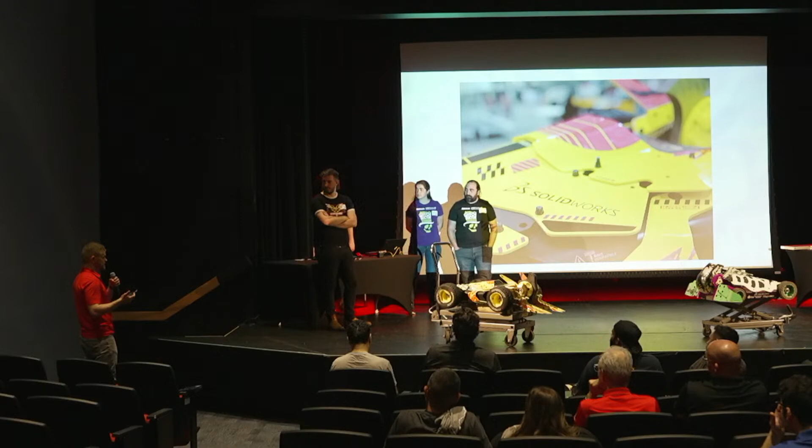Some great questions in the chat about the different configurations, the different versions of the robot. I think that's something both teams highlighted today, the use of configurations, changing out weapons, changing out pieces of the design. Do you find any one design the most common, your go-to? Could be for either team. And an add-on to that, folks want to know, do you reuse parts? Is there any parts that live on and go forward to the next season?

Hypershock has 2 primary configurations, neither of which are shown on the robot currently. When we go to live events, we think it's fun to show configs we couldn't or wouldn't run in a match. So usually when we're running the single disc configuration, we're running it with a large wedge.

The single disc is actually constructed out of 3 separate pieces of steel. In the middle, you have a piece of inch-thick S7 tool steel, hardened to 57 Rockwell. It's substantially harder than most of the armor in the rest of the field. It is sandwiched between 2 pieces of AR-500. The reason it's sandwiched like that is if we're fighting a big horizontal spinner and that comes across, we don't want it to hit the relatively brittle piece of S7.

So the relatively soft piece of AR absorbs that impact. We're running with the wedge. The wedge is designed to kind of deflect things up and then back out. There's little wings that hang out over the top of the surface.

The other configuration we run is the dual disc configuration. That's 2 1.25-inch S7 tool steel discs with a hub between them. The hub is magnesium to save weight, improve the MOI efficiency, and then we run the forks that you see on the robot currently. The reason we both kind of like that double disc is that it gives us a wider, effective attacking angle.

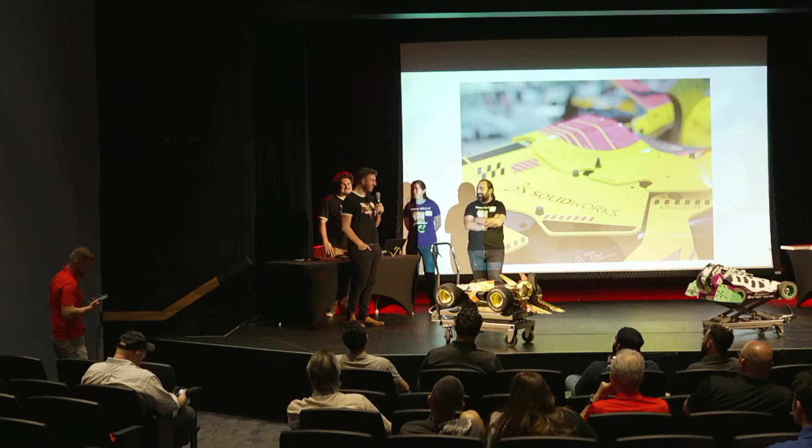The general question is how much time is spent driving and practicing before. Not enough. Did I mention I built the thing on site? For us, the Battlebots ship date is a week before filming, roughly two weeks, so we try to ship a functional robot. That's our goal.

We don't often test the weapon. We actually never tested the weapon physically hitting something before we shipped, until this year, when we were able to do that safely. We get the robot driving as early as possible, which requires the assembly and wiring and everything, and we drive it around the parking lot. But we've been using the same motors for every season of Battlebots so far for drive, so we have a pretty good idea of the mechanics of how it's going to drive and aren't expecting surprises there. But we don't practice driving probably as often as people think we do, or as often as we should.

Just one fun anecdote from what was just said. This year in Witch Doctor, we changed the way we route the wires from the left side of the robot to the right side. They used to route through the back, and we decided that in the back you can get hit, it's kind of dangerous, so let's move them. We actually moved them to right behind the weapon, which is the most protected place.

As Mike was saying, the very first time we tested the weapon, we hit the test load. We just had all those connections wrapped with electrical tape. When we hit the test load, the recoil to our robot was so hard that those wires slammed into the titanium top plates, cut through all the electrical tape, created a short in the robot, and actually blew one of our $500 controllers.

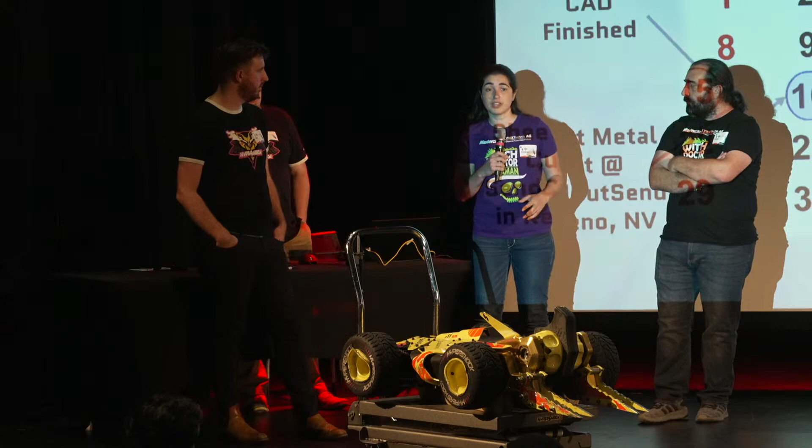For Witch Doctor, we use lithium polymer batteries, MaxAmps batteries. We are sponsored by MaxAmps, but that's not the only reason I'm saying this - they have a really high discharge rate, which we need running 5 motors at the same time on Witch Doctor, about 600 amp draw at full speed and full weapon. That's not something regular batteries can deliver without blowing up. We've definitely done testing where batteries are not happy and get puffy just because of that current draw.

Yeah, like most of the robots, lithium polymer batteries. We had 4 motors, all running 16S, so north of 60 volts, and peak current limits were at 250 amps per motor. So in a terrible worst case scenario, we were drawing 1,000 amps instantaneously. No fires, no magic smoke - it's a double win.

In terms of routing and schematics, I did a little bit in KiCad this year. I need to venture into SolidWorks Electrical.

But we needed a little custom board for the magnetic encoders that Kyle was talking about, so I made a little thing there. The simplest little circuit. We try to be as simple as possible.

One of the running gags of BattleBots is, well, they're not robots, they're just RC cars on steroids. And that's because the things that make a robot—sensors, feedback, true semi-autonomy—are so fickle, like Mike said. It's another thing to go wrong, and we never have time to really implement those things and develop those systems properly. So we end up with very expensive RC cars with relatively straightforward electronics. Yeah, that's the way it is.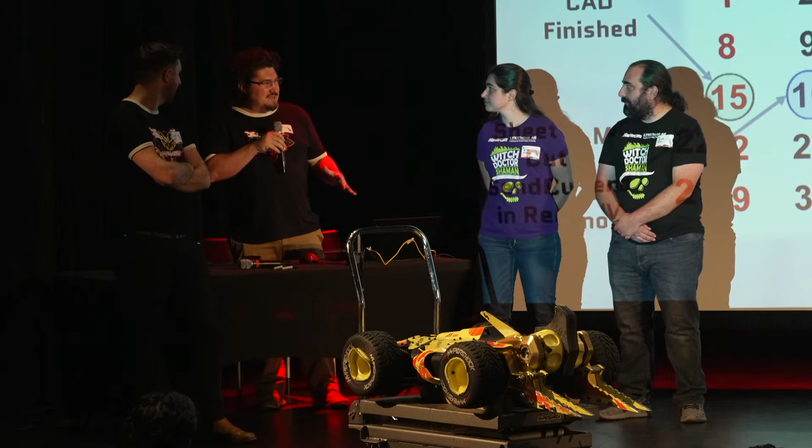Sure, so off the top of my head, I believe the design guide is around 30-ish pages, and that's full of limitations. So if you're running pneumatics, you're only allowed to go up to a certain pressure unless you can justify to BattleBots that you need more pressure and that you can do it safely and your robot can handle it without exploding. Same kind of rules go for hydraulics. If you're running any kind of fire, they have to test that. They have limits on how long it can be, how much gas you can carry, what kind of gas you can carry.

For all of our batteries, I think the limit before you need a waiver is 48 volts. They're talking about raising that to 60, they might raise the overall cap to 60. There were 2 teams this year running over 200 volt systems with the kind of motors you'd see in an electric vehicle. So they're pulling crazy amounts of power, but at very low amps for that power trade-off.

Beyond that, the whole robot has to operate consistently and safely. We talked about max weapon speed, so 250 mile an hour spinning tip speed. If your weapon doesn't complete circles—like a hammer—there's technically no limit on that, but I don't think any are pushing faster than 250 yet. It also has to fit through the door of the battle box, and some robots, it sounds silly, but they're really pushing that. We fought a robot called Mammoth this year that's taller than I am, it's huge. And huge is also another robot they have to bring in sideways because it doesn't fit going forward through the door. So there are some physical limitations, but it's mostly safety concerns—we have to keep the sport safe. So anything that can go through the polycarbonate walls is not allowed. Will mentioned before there's a cannon design on BattleBots, but it's pretty restricted due to those concerns.

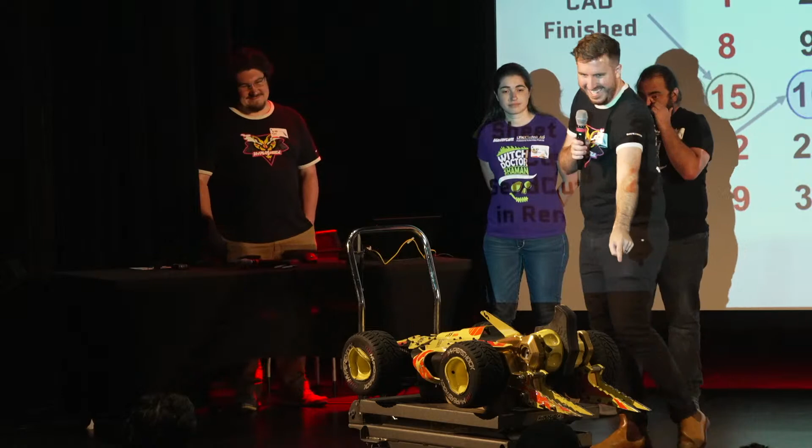Like looking at the forks over here, we were looking at everyone's reveal pictures, because everyone's more responsible than me—they already had the robots ready and shipped them to BattleBots, and I'm still building the thing. So we could see everyone's pictures, and I see, oh, there's a lot of forks. I guess we should add some forks. So I think the Thursday night before filming, the 19th, on that day I designed those forks. We had them overnighted, and we couldn't even powder coat them in Miami. We had to find a new powder coater and bring our own powder to Vegas. Luckily we found a local guy who was a champ—what a hero—and he ended up doing all sorts of stuff.

But fortunately, everything worked in terms of fitment. For our sheet metal parts, anywhere a bend line intersects the outside perimeter, I usually put a little tiny notch so you can draw a straight line across the part where the bend lines are. Obviously we have a bend drawing that we give to the bending guy, but if he wants to trace those lines out, it's really obvious where they go.

What? But that's ugly, you can't see it. Did you ever know I did that? Well, now I do. Yeah, exactly. So it's just a quick reference.

If someone measures - these robots are very organic in shape - and if you have a weird, funky bend line that's like 47.2 degrees off from the edge with some weird reference, you want to make sure it's right. So last year, things actually went wrong.

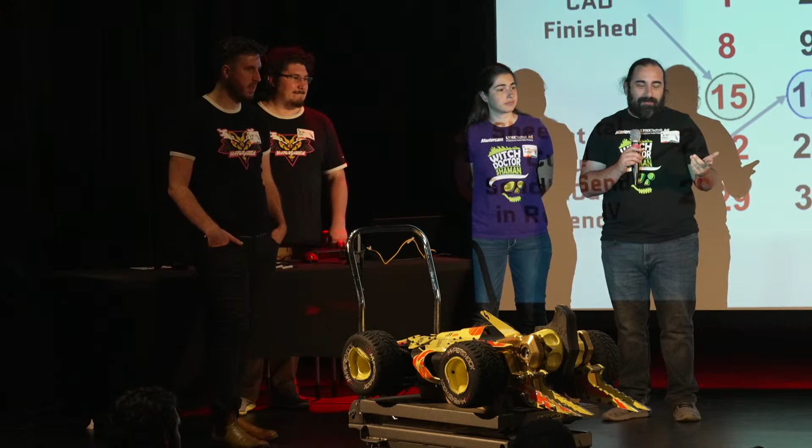We got our parts bent. They actually get bent up in Michigan, and the guy sent the parts down, and they were off by not much - maybe 1/8 of an inch where the holes are supposed to bolt in. This was right before we shipped, so rather than find someone local to fix it, we overnighted the parts back to him, and he tweaked the bends a little bit and sent them back to us, and they fit perfectly the second time around. But this year everything fits perfect, so no problem.

Because we added those bend gauges, that was a really quick reference to make sure the bends are the right angle since it's a funky compound bend. I got lucky.

Well, I think with that, we were all very lucky to have you guys here tonight. So let's have a quick round of applause for the Battlebots teams.

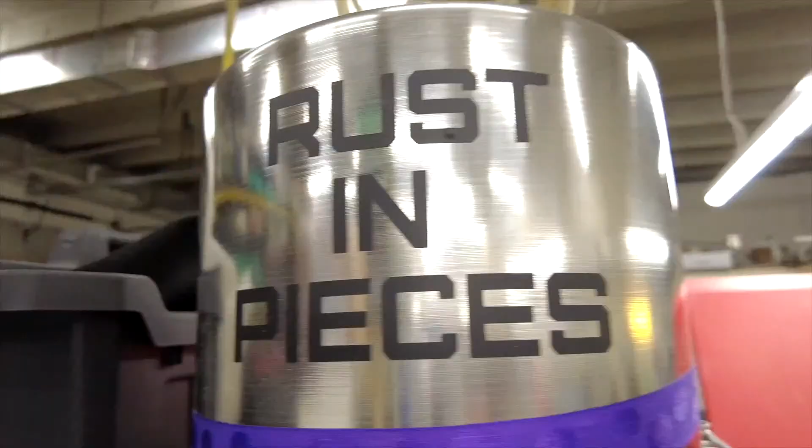So this episode gave us a look at two great things, right? Good people and good robots. And before we go, we wanted to give a few shout outs on that note.